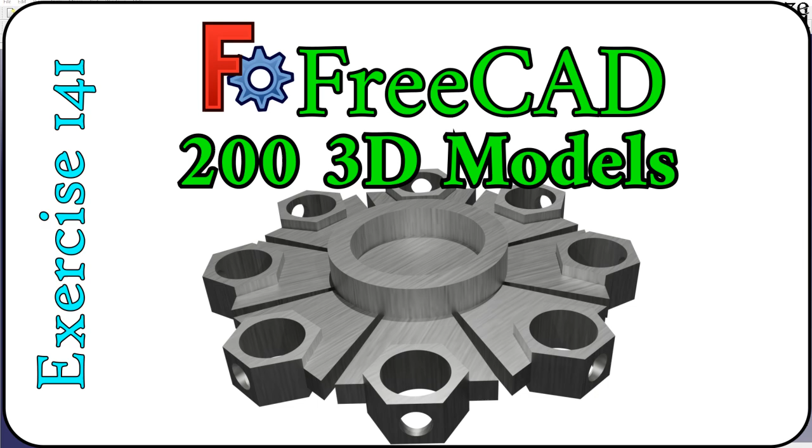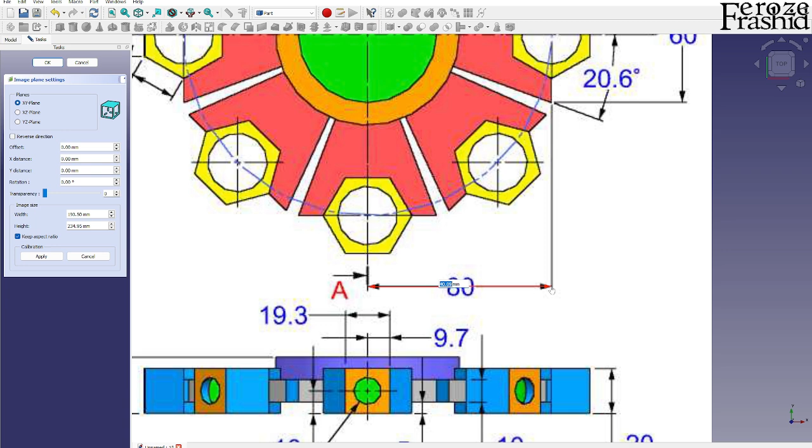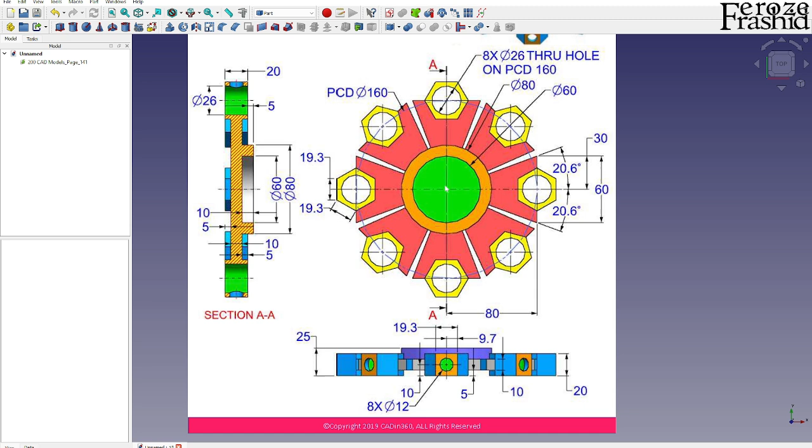This is a very interesting object, and I think we will need multiple sketches, at least 3 stage construction for this model. These repetitive portions I will be building through the draft workbench, using the polar array. But this middle circular tube is not at the same height as the edges, so we will have to do 2 different operations on that. And then there is a circular head base. Let's see where it takes us.

First of all, I want to place the center of the workspace at the center of this image, and then take the axis close away and start sketching on the XY plane.

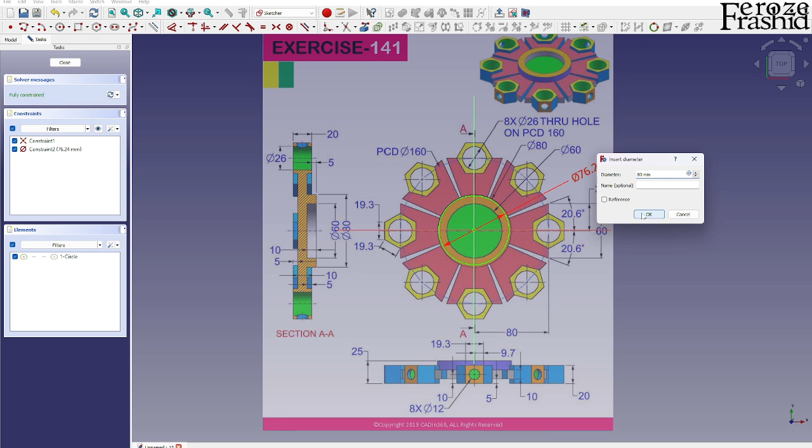How about I build that circular base pad first? The first sketch is very simple: take this circle and make a diameter of 60 - actually it will be 80, so we go all the way to the outside. I think that's it, and I'm going to rename that as sketch circular pad and extrude it for, I think, 10 millimeters.

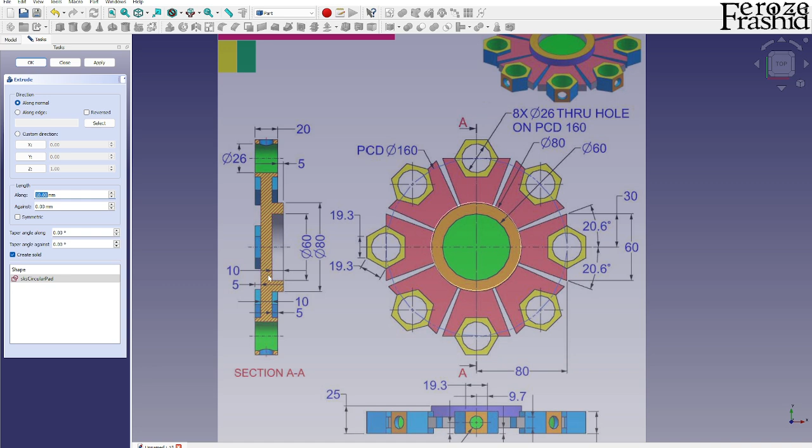Now I want to make that symmetric by the axis, so that way I can keep track of the 2 other parts that I'll be building.

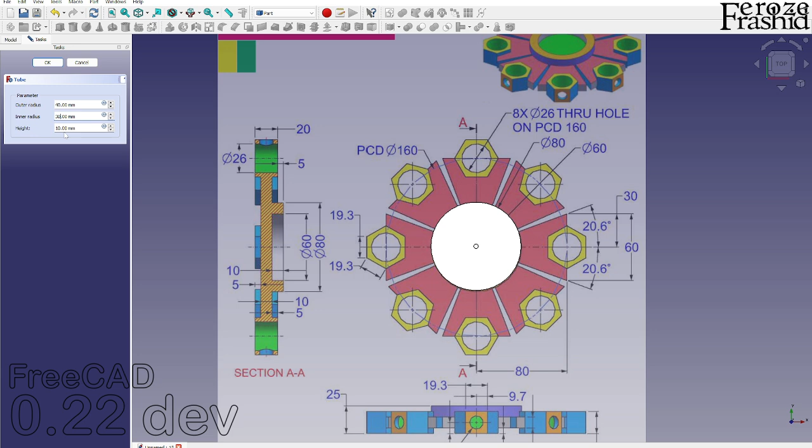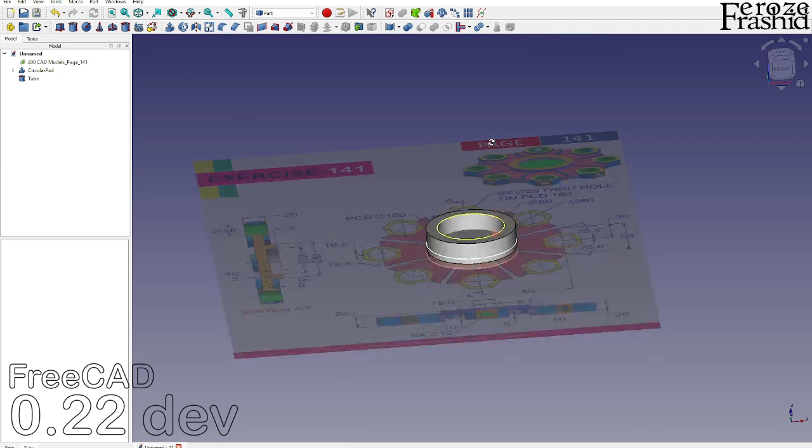Then I want to work on this circular edges part, which is actually a tube. So we can build a tube with outside radius of 40 and inside radius of 30. Height-wise, I'm just going to say this is 20. So that's 20 height. All right, so now this is staying.

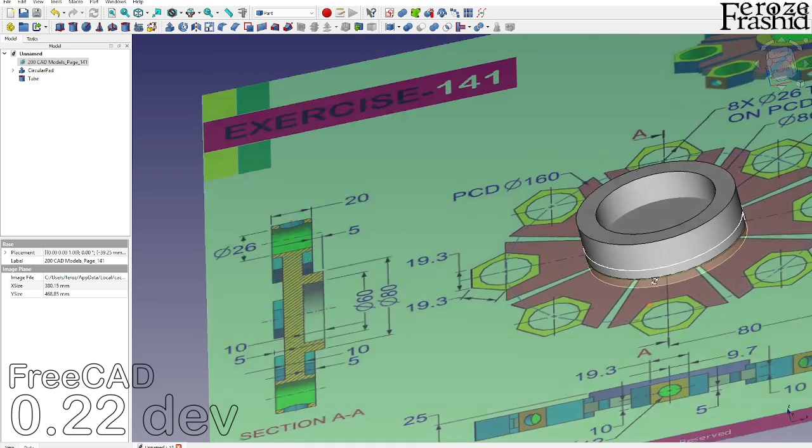This is the base pad, and this tube is staying 5 millimeters above that, but we want that tube to match with the pad, so it will go down 5 millimeters. On the placement tab, come to the Z and say -5. Now we have both of them finishing at the same time.

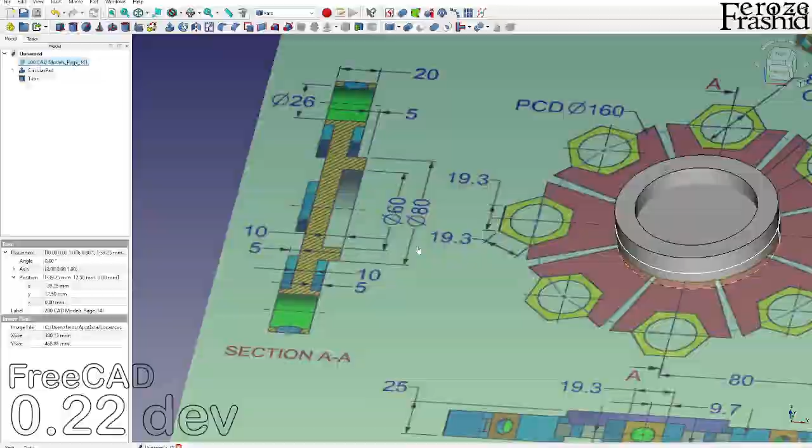We could actually use the revolve to build this, but I think this is fine. This repetitive portion, we will have to have 2 different bodies. The first one is this hexagonal part with a circular hole inside.

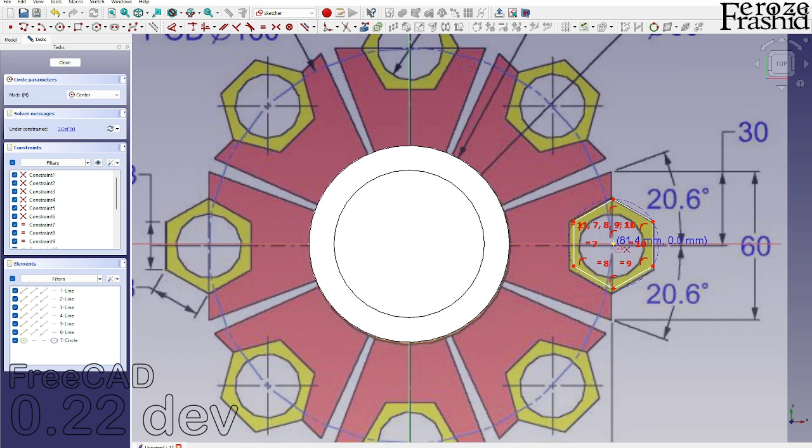Let's go ahead and draw that in one of the sketches. It will be one hexagon, and then I'll draw a circle in the middle. This point will be 80 millimeters away from the center, got that, and the inside diameter of this hole is 26, so this is going to be 26.

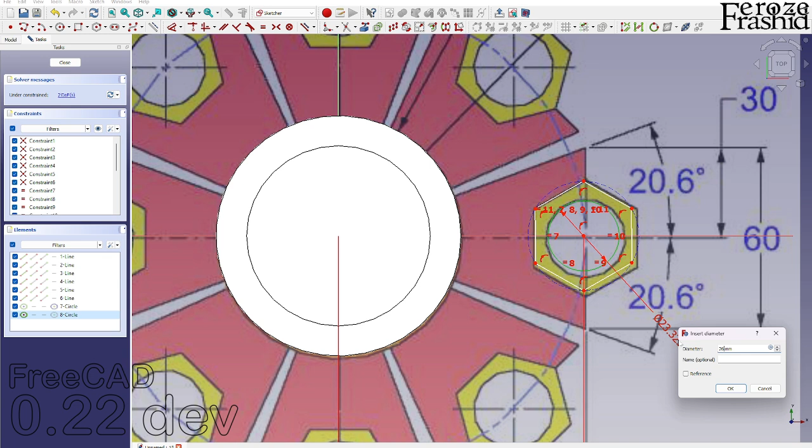And finally, one of these edges will be 19.3, and then that will be vertical.

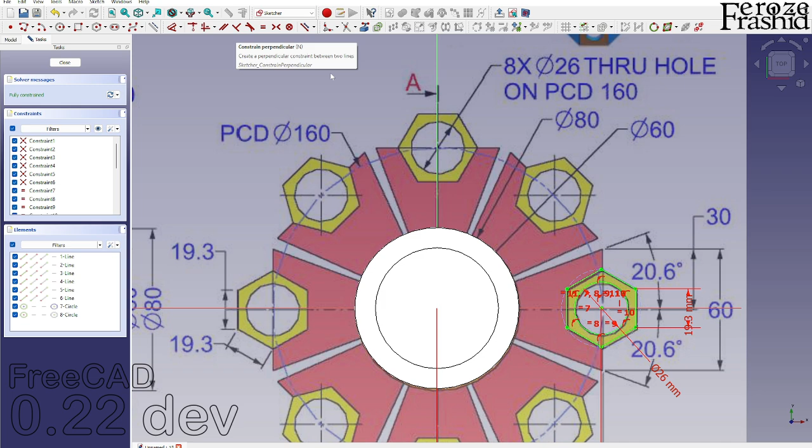By the way, I am drawing this in FreeCAD 0.22 developer's version, so you see some of the sketching options are different, which is great. I'm enjoying it. If you are on 0.21, nothing changes - all the commands are there, but the outlook is a little different.

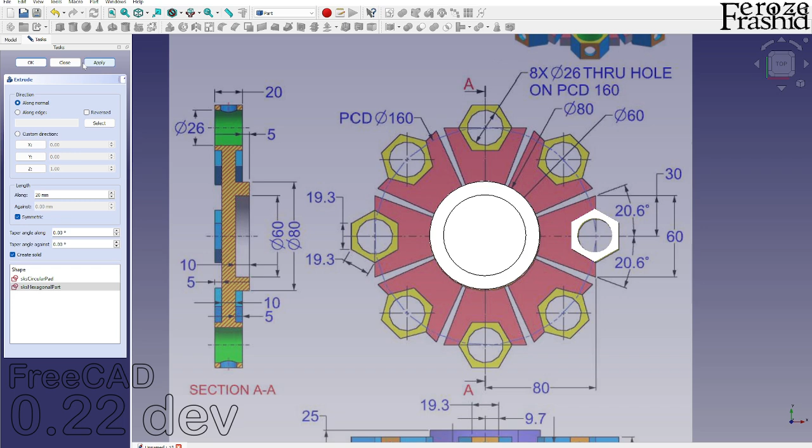All right, so we have that hexagonal part. I want to extrude that for 20 millimeters, and this one will be symmetric by the axis as well, so it kind of goes down just a little bit, like you see here.

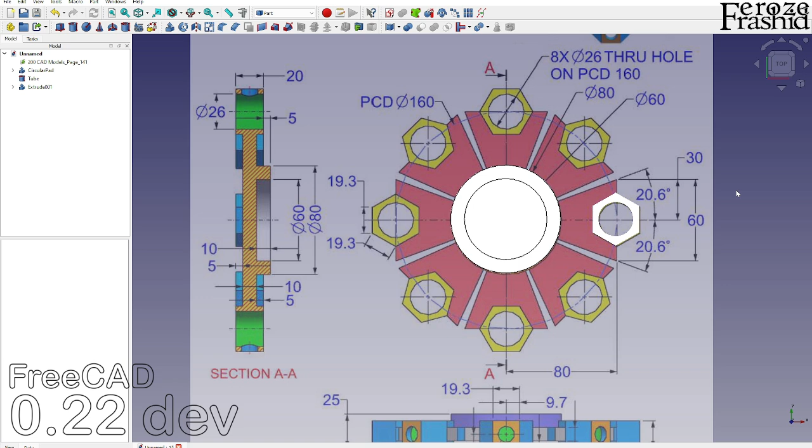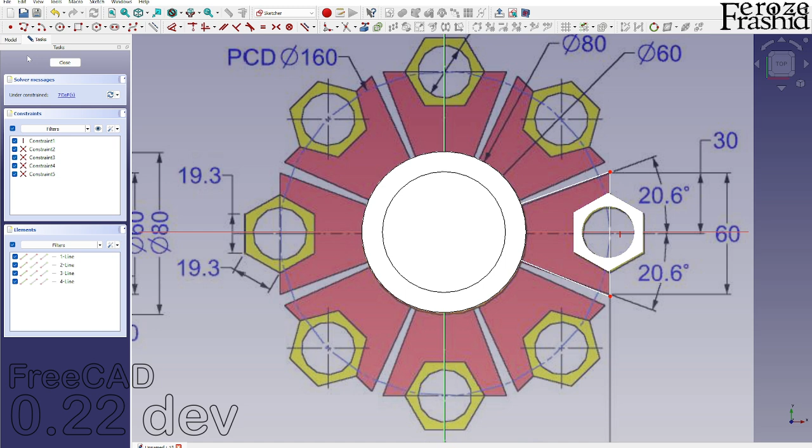Then what I want to do is build this trapezoidal sort of thing, so that is going to be another sketch on the XY plane. On this one I'll have to build this whole shape. Let's take a polyline and draw the outline real quick. If you'll notice, I drew these lines kind of inside there, so I'm going to hide this and see what it is now.

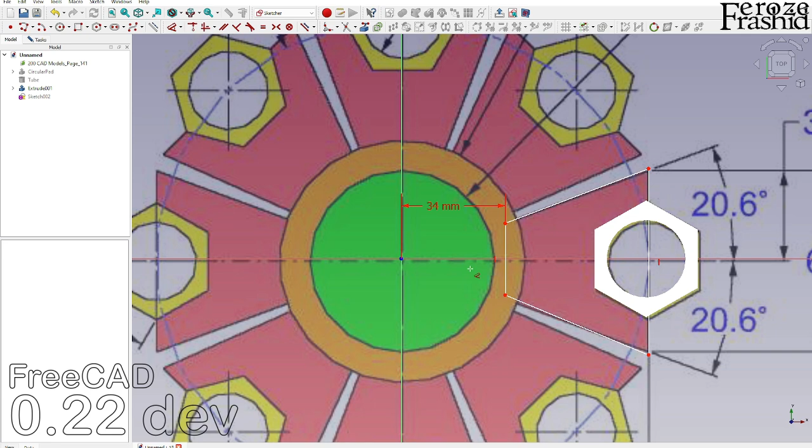This will be vertical, but I want to keep this past the circular area, so this distance between the centers is going to be at least 34, and then this is going to be 80. We got that, and then the length of this is 60, and finally the angle between these two - select these two lines and set the angle to 20.6 times 2.

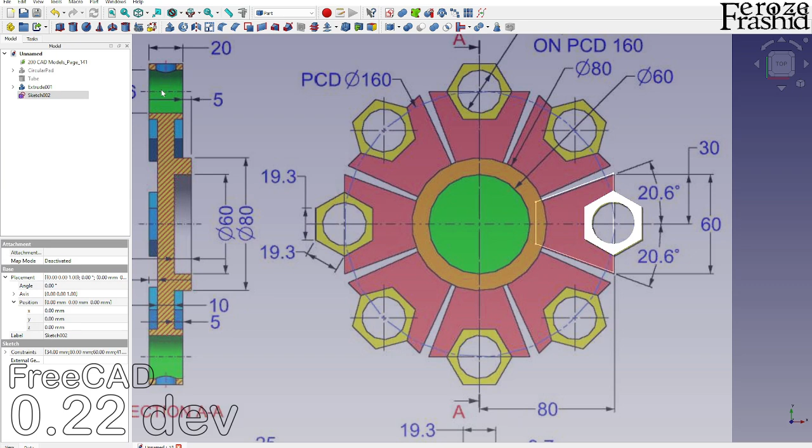What else? I think we can make these two symmetric by the axis, hit S on the keyboard, that's the shortcut, and we make these two symmetric by the axis. So that is our trapezoid.

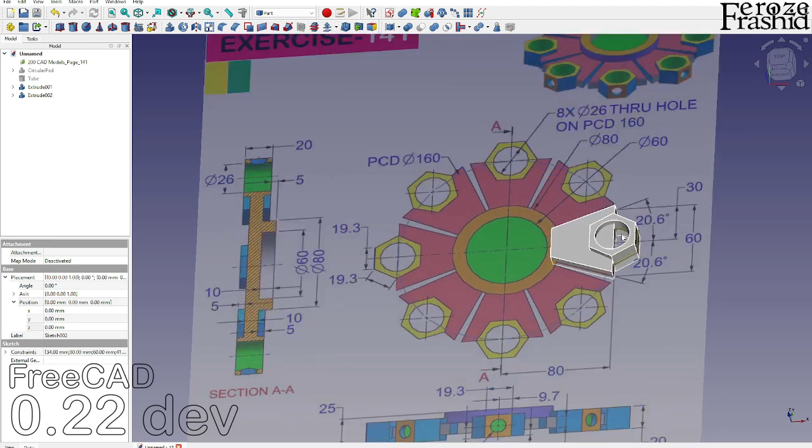I want to extrude that 10 millimeters, but symmetric by the axis. Now we have this trapezoid going through the circular hole that we wanted to keep free, and it doesn't look good now. So what I'm going to do is take these two parts and make a connect.

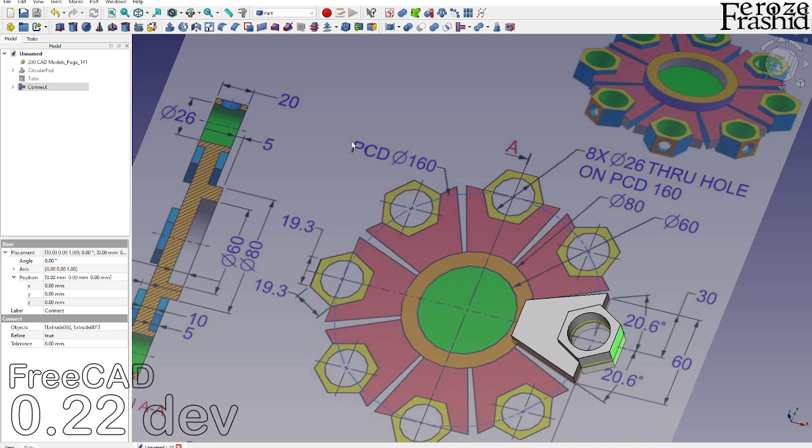Okay, let's go ahead and make the connect. Then we see there is a hole on this edge, and we can do that. So we can draw a sketch there and make the hole, or just place a cylinder in there and cut it out.

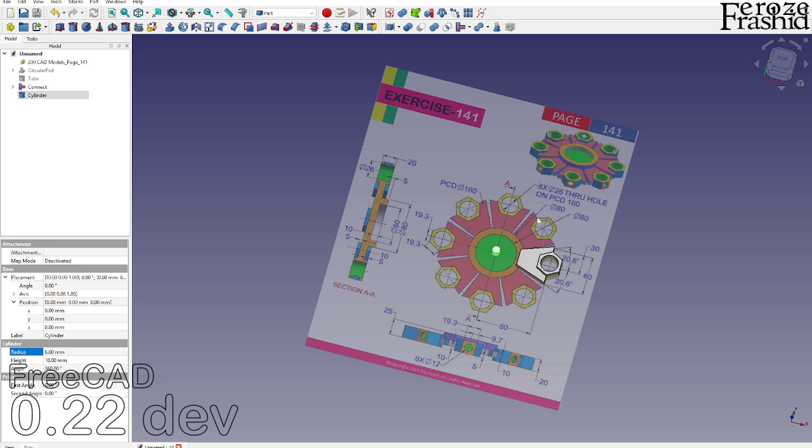So that hole would be 12 millimeters in diameter. Let's take a cylinder, radius 6 millimeters, height 10 should be fine. I want to transform that, lay it down just like that, and move it out so it crosses the wall. The Z direction wise looks good, hit OK. I think we are good.

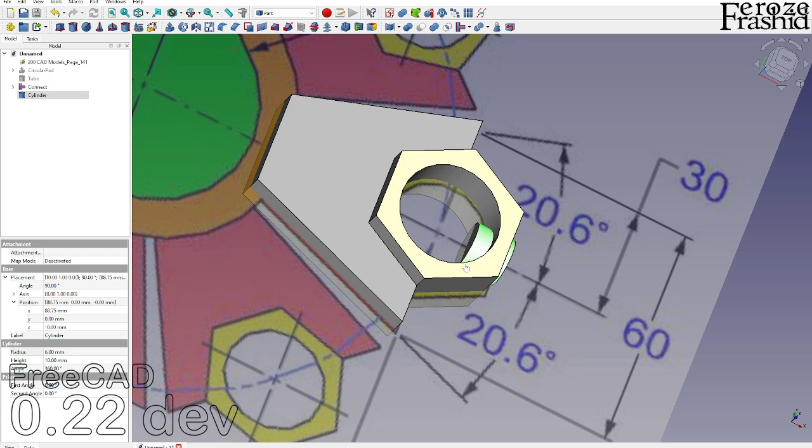Now I want to take this part and take this part out of it. So that is our repeating unit. We have our repeating unit. I'm going to go ahead and rename that.

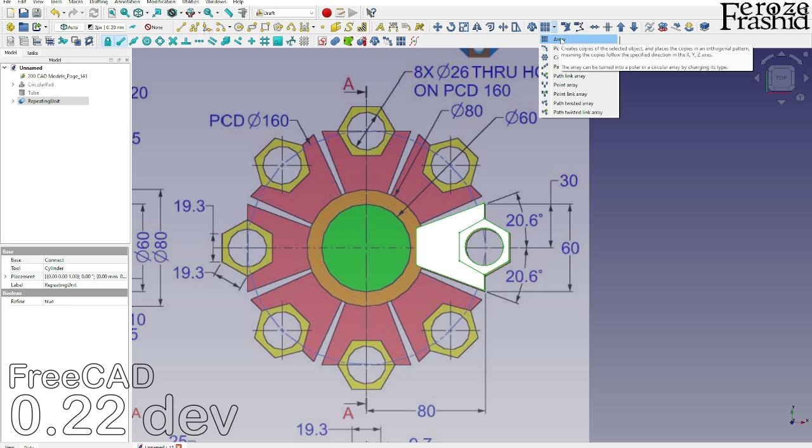Then take the polar array. This is my custom toolbar on the global toolbar side. If you don't have it built yet, it's really helpful, build it. If not, you can go to the draft workbench and find the polar array under array tools, and select the polar array.

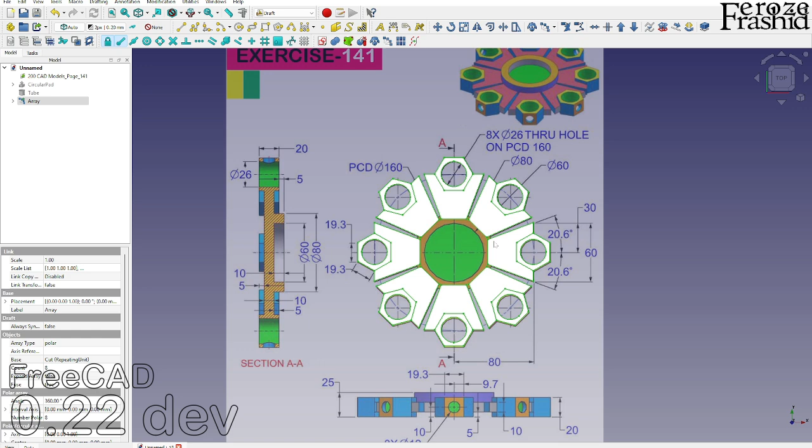From here we see that we will have to build 8 of them. So hit 8, then reset the point and hit OK. Because we had this center as our workspace center, this polar array building is really easy. So if you know you'll be arraying something, keep that center in mind when you start working, especially on draft polar array or Part Design polar array.

If it's in the Lattice2 workbench, we can manipulate a little more if needed. But for draft, it makes it really easy if you hit it correctly. Otherwise, you'll have to find this dot, the center, manually, which could be a little challenging every now and then.

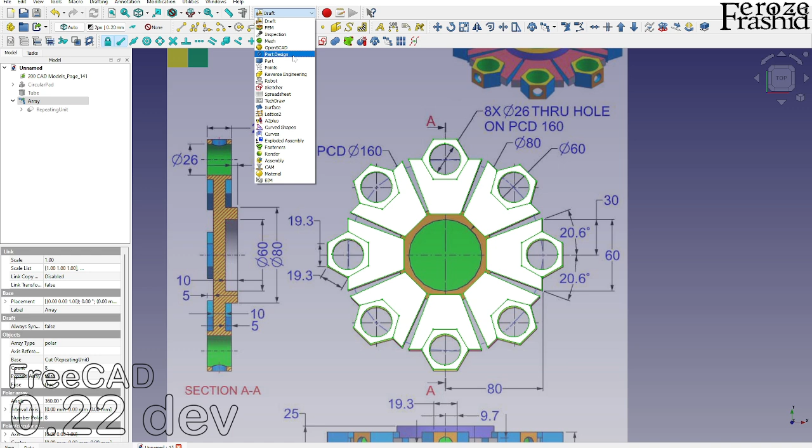But anyway, so we have our polar array option, and sometimes I've seen that this creates an issue if it's not fused. So this is now fused, which is great. Or if it becomes an issue in further Boolean operations, we can make a compound, but we'll do it later if needed. So we have the object now.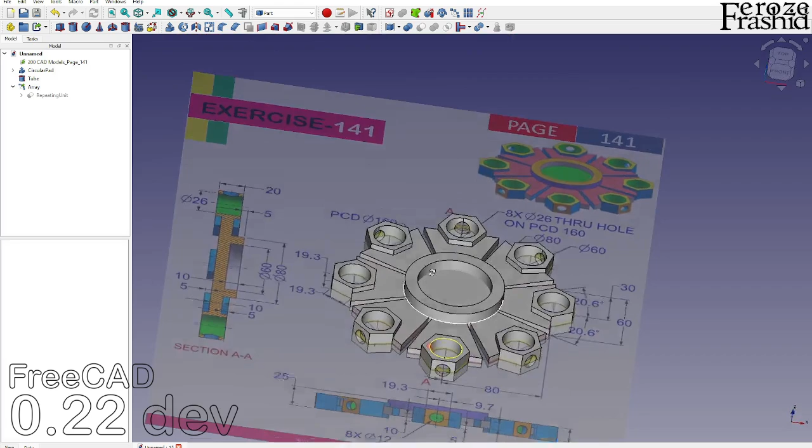Now all we have to do is take all these three and make a fusion. And that object is gone. So maybe we'll have to do the compound first, then take all these three and make a union.

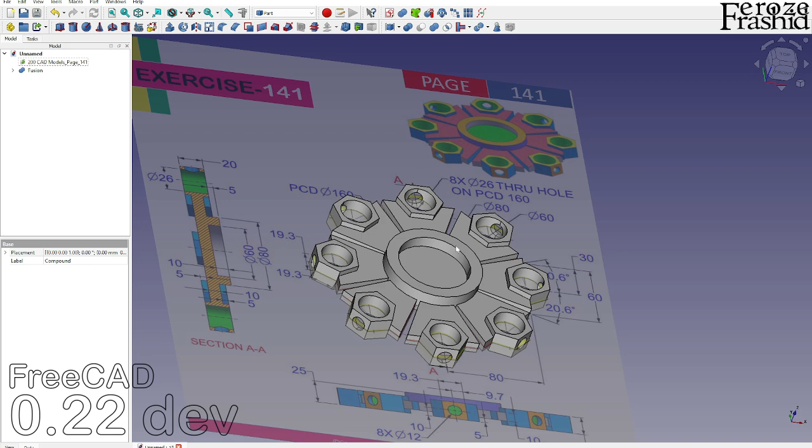So that's what I was saying. If the array doesn't help with your Boolean operation, just make a compound. That helps. Just to make sure we have a full solid, we can do a test.

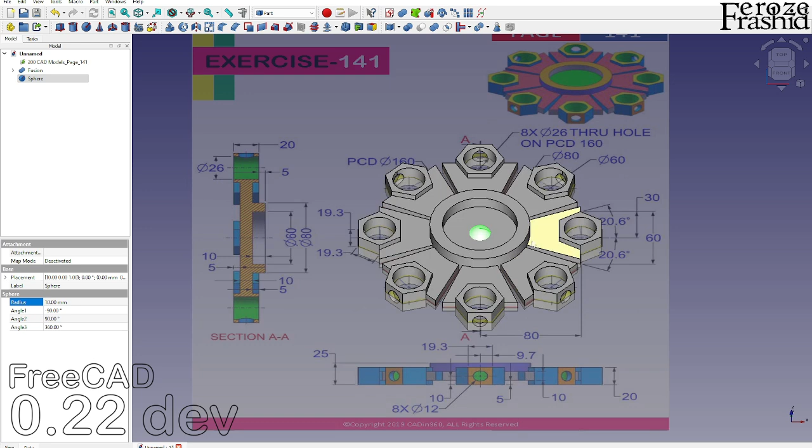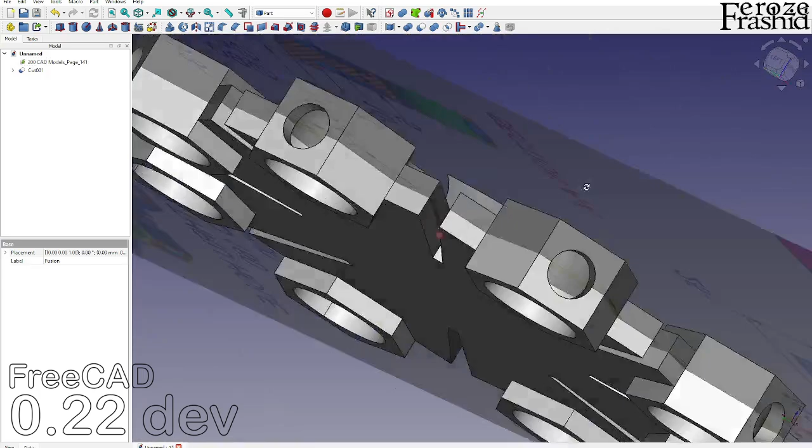So we have a cylinder, right? We have a sphere, and let's go ahead and place it where it will cut through all three parts that we built and make a cut. So what we have is a clean cut through all three pieces that we pieced together, which says that we have a final solid right here.

This is the final solid, and that is our final model for 141. No edges need to be filleted or anything like that. So hopefully you like this process of building this model in FreeCAD 0.22.